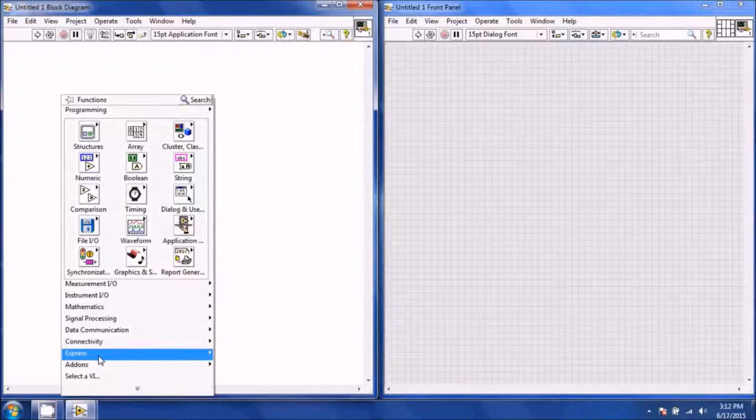And the first thing I'm going to do is insert a DAQ. Go to Express, Input, DAQ Assistant. Then I'm going to go to Acquire Signal, Analog, Temperature, and Thermocouple. I'm going to select my first thermocouple DAQ with the only single channel we have.

And I'm going to change the maximum range to 200 because we are collecting signal at 100 degrees C, which is boiling water. The first thermocouple type is a T-type, and cold-junction compensation is built in. Now you notice that one sample on demand is the acquisition type for this thermocouple DAQ.

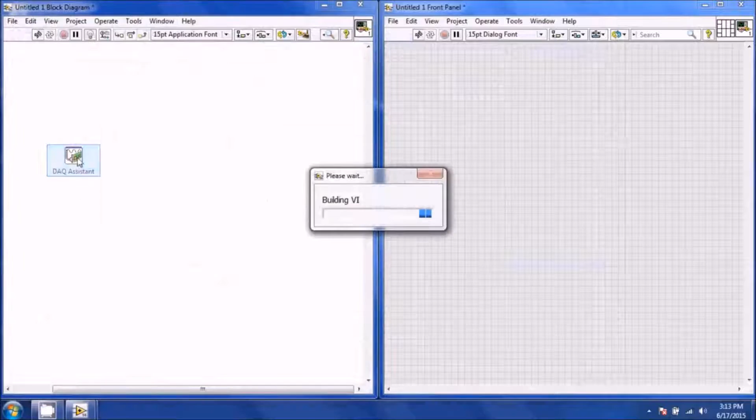Now we can only insert one thermocouple DAQ per DAQ Assistant, so we're going to have to insert another DAQ Assistant. So we're going to go in, Express, Input, DAQ Assistant. I'm going to Acquire Signal, Analog Input, Temperature, Thermocouple, and choose a second device's channel. And again, we're going to change this to 200.

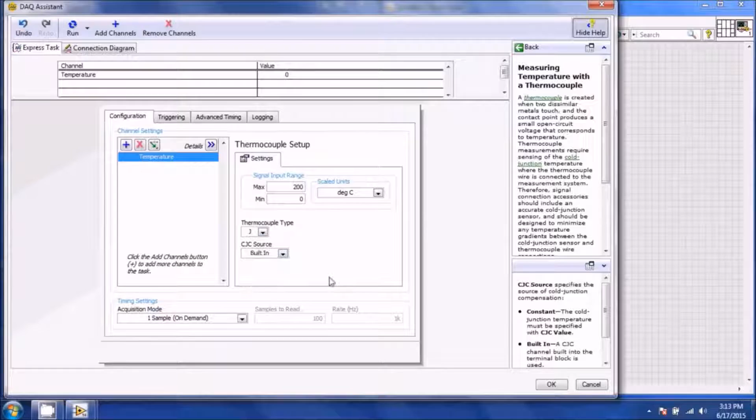Now the second thermocouple type is J, so we're going to keep that as J and do built-in, and you again see that it shows one sample on demand. Now one sample on demand means that it will take one sample, stop, take another sample, stop, take another sample, stop. So in order to create a plot for this, we need to create a waveform chart.

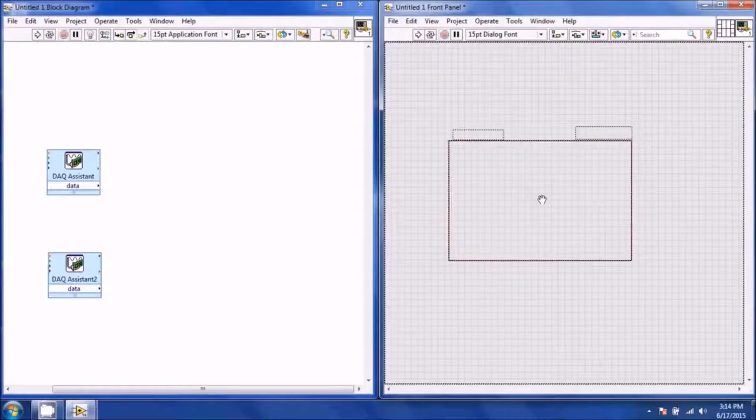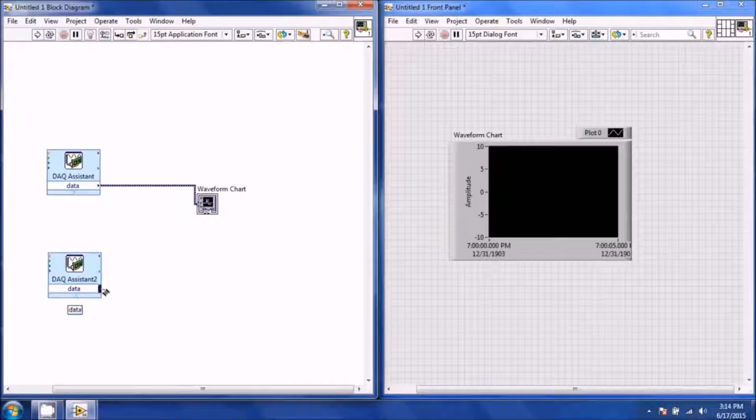And what a waveform chart does is it will take the previous data and add another point on the same chart. So I'm going to connect the output of the first thermocouple to the waveform chart and the second thermocouple to the waveform chart, and you notice it automatically does merge signals to the waveform chart.

Now, in order to run this, you'll see that when I hit run, it only gives you one value. Then you hit run again, and it'll give you a second value. You hit run, and it only collects one sample at a time. So you would see that if I had a waveform graph, it would not show the samples.

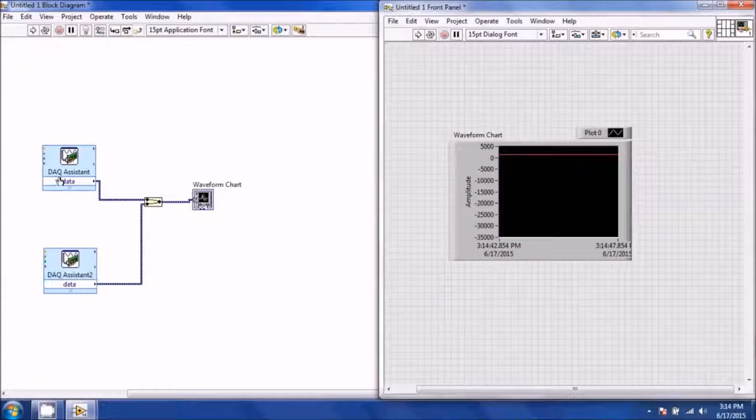Now you can see I have a white and a red line. The white line corresponds to the top thermocouple DAQ, and the red line corresponds to the bottom thermocouple DAQ. So the top one's a T-type, the bottom one's a J-type. So if you go over here by plot and expand it, you'll see a legend.

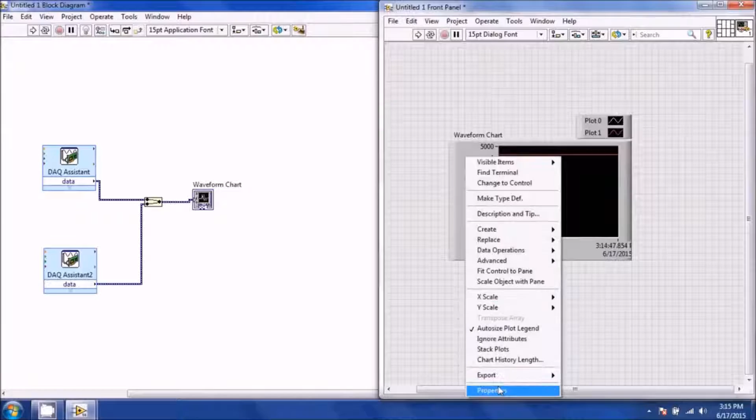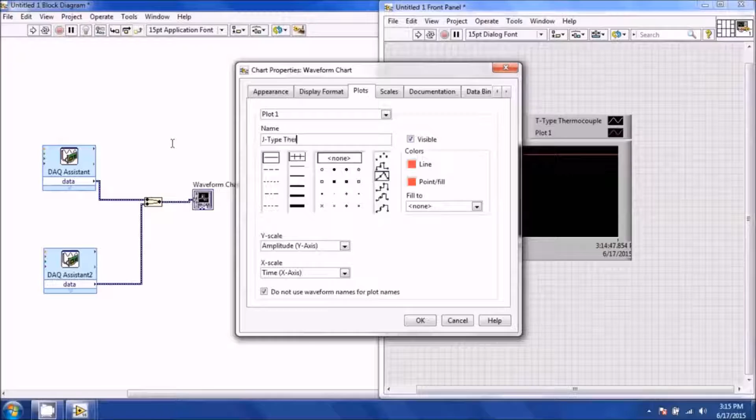We can change the names of this by right-clicking, going into Properties, go to Plots, then do not use waveform names for plot names. And plot 0 is the first one, which is T-type thermocouple. And then go to plot 1, which is our J-type thermocouple. So I'll say J-type thermocouple. So now we have a legend that tells us which thermocouple is which in the waveform chart.

Now, since when we hit run it only collects one sample and then stops, we need to put this in a loop in order to collect multiple data points. So you're going to right-click, go to Express, Execution Control, While Loop, and drag a box around your two DAQs and your waveform chart.

Now, we don't actually want a while loop, so select the border, right-click, and replace with for loop. So now it's a for loop, which means that it will collect samples starting at 0 up to a number of iterations. So we want to define how many samples it collects by creating a control for the iteration count.

So this is our maximum iteration, so I'm going to name it maximum iteration. This is the equivalent of the number of samples we want. And then down here we can create an indicator for the iteration count, so it will tell us what iteration we're at. So if we go to the front panel, I organize this so we can see it. I've got a control for maximum iteration count, and then an iteration count indicator.

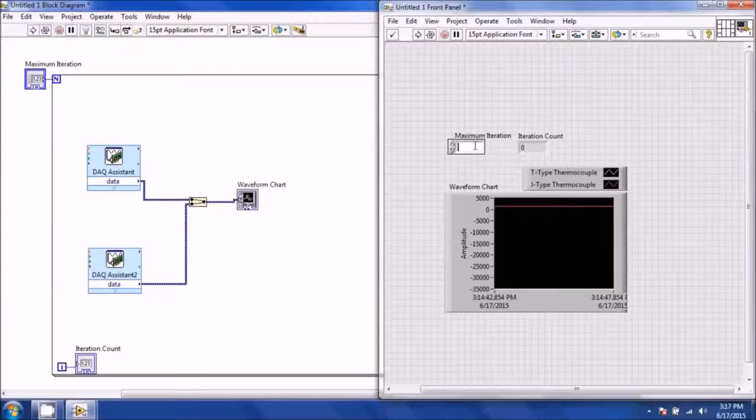Now the way the iteration count works in LabVIEW is that the count starts at 0 and then increases from there. So if I want 100 iterations, the final iteration count is going to be 99. So if I hit run, you can see that it's collecting multiple samples now, and it's at 22, 23, 24, 25, 26, and it keeps on collecting samples.

And it's going to keep on collecting them until we get to 100 samples, or 99 in iteration counts because it starts at 0. And now you can see it stopped.

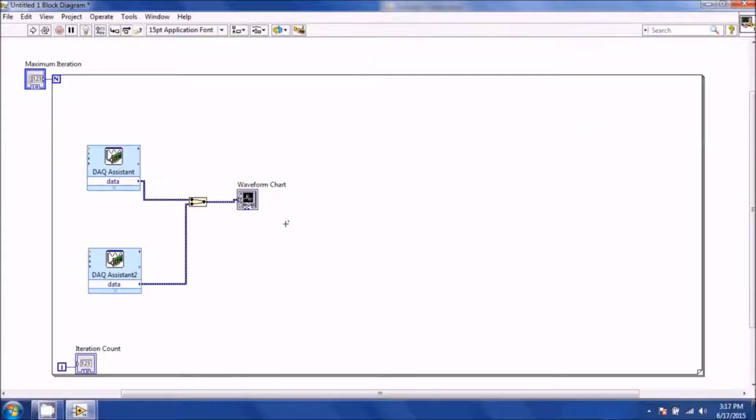Now the next thing we need is to be able to control the interval at which samples are collected. To do that, you right-click, go to Express, Execution Control, and Time Delay. Now I'm going to create a control for time delay, and I'm going to put it on the front panel.

Now the time delay is another method of saying hertz because it's 1/seconds. Now the thermocouple DAQs you have can only sample at a rate of 4 hertz, which means 4 samples per second, which is equivalent to a delay time of 0.25. So if I insert 0.25 for 10 iterations, that means it's going to collect for about 2.5 seconds.

So I go ahead and hit run. Excuse me. And you can see that it collected the data. Now I can increase the delay time, which means that every half second it's now collecting a sample. So it's going to take about 5 seconds to collect data instead of about 2.5.

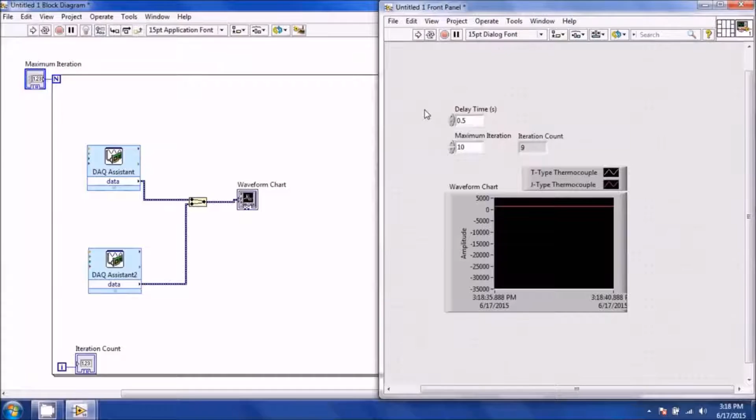Now we don't want to just be able to see the chart. We actually want to see some numbers. And in order to do that, we need to insert a block called collector. And that's under Express, Signal Manipulation, Collector. And you're going to need one for each signal, one for the T, one for the J.

And you're going to set this to the default 1,000 samples as the maximum number of samples that it'll collect. And you're going to connect the signals into it from the 2 DAQs, and then the output will be a collection of all 100 data points, because initially what's coming through this DAQ here is one data point at a time based on the time delay. So every 0.5 seconds one data point is coming through and then being displayed on the chart.

Now what the collector does is it takes those data points and stores them in an array and then returns the full array at the end of each iteration. So it'll take the first value, then the first value and the next value, and it'll keep on displaying it. So you'll see your mean changing as you're collecting.

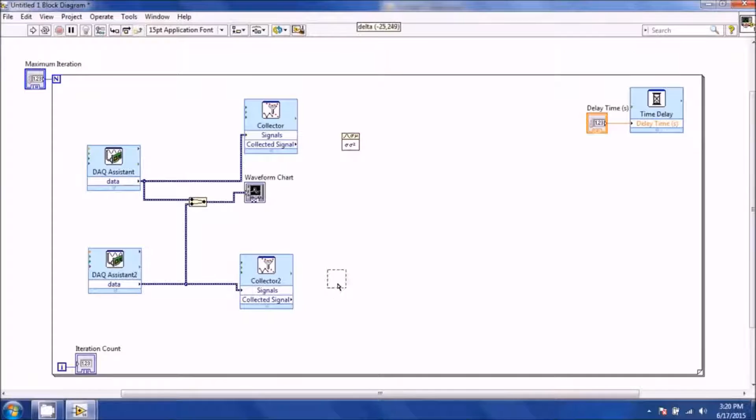Now, we want to display the mean and standard deviation so we can get some statistics about the temperatures we're reading. So I'm going to insert two standard deviation blocks because it's got both the mean and standard deviation in it. And I'm going to connect these to the output of the signal collector. And then I'm going to create an indicator for the mean. And I'm going to call this T-type mean, because then I know that it's a T-type thermocouple mean.

And then I'm going to create an indicator for the standard deviation. And I'm going to call this T-type standard deviation. I'm just going to abbreviate it. And then I'm going to copy these two labels to the J-type, and then I'm going to fix it by changing T to J.

Then I'm going to go to my front panel and reorganize it. So I have my T-type mean on the left here, followed by my T-type standard deviation. And then I have my J-type mean, followed by my J-type standard deviation.

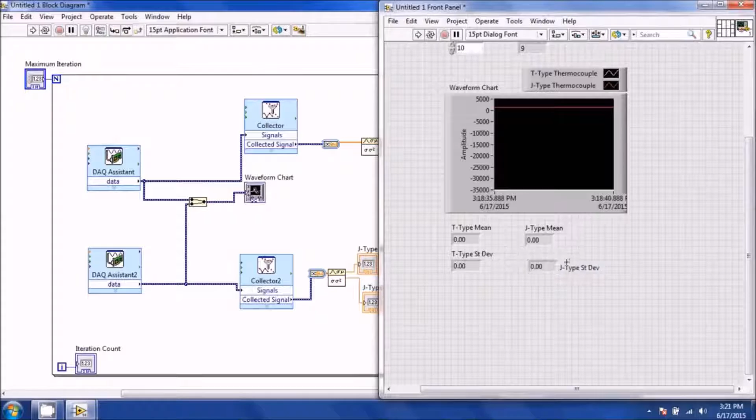Now again, remember that when you insert an indicator on the block diagram, if you're not able to see any results, you need to right click on that indicator, go to Properties, Display Format, and then you change the 2 to a higher number such as 4. So instead of showing 2 decimal places, it shows 4 decimal places. And you can do that with all 4 of them.

So now when I hit run, I'm going to collect 10 samples with the interval of 0.5 seconds, and then it's going to stop. And that final mean and that final standard deviation is the standard deviation and mean for the entire 10 samples.

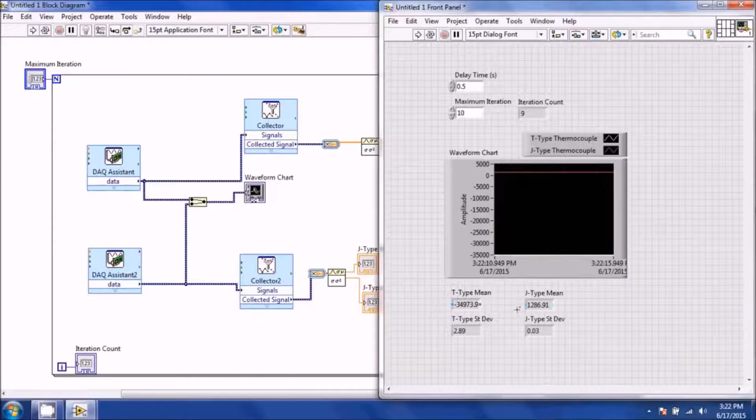So now that we are able to display the temperature in a chart as well as in a mean and a standard deviation, we want to be able to save this data. So to save this data, we've got to insert our Write to Measurement File. So that's on Output, Write to Measurement File. Now, I'm going to select one column only for time, use next available file name, and I'm going to save it on my desktop as test.lvm.

And I'm going to hit OK. So the first thing I'm going to do is I'm going to merge the two signals for the two thermocouples. That way we have the time column, the first time column that corresponds to the X and Y values, basically two channels.

Then I'm going to add in my thermocouple means and standard deviations. So I'm going to start with a T-type. Then I'm going to do the standard deviation and then the mean and standard deviation. And then I'm going to do the J-type, mean and standard deviation.

Now the next thing you want to save is the delay time as a parameter. The main reason you want to do that is that it tells you the time between each sample being taken. When you look at your Excel spreadsheet, it'll have the values labeled as 0, 1, 2, 3, 4, 5, 6, 7, 8, 9, 10. Now, in order to change those into a time variable, you would have to convert the number by multiplying it by the delay time. 0 would be 0, 1 would be 0.5, then 1, then 1.5, 2 if you had a delay time of 0.5.

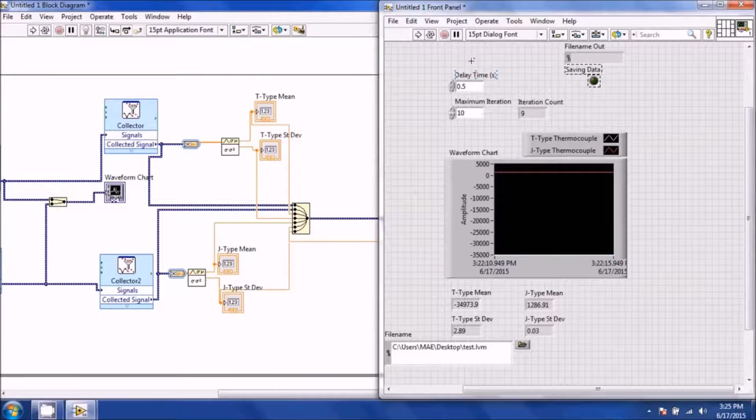Now with the for loop, there comes a little issue when you save the data, and I'm going to show you that right now. So when you hit run, it's going to keep on making a bunch of different files. When I open it, you're going to see that it keeps on doing a header every time because every iteration is collecting that value. And if you have enough iterations, it'll create a bunch of files since you said use next available file name.

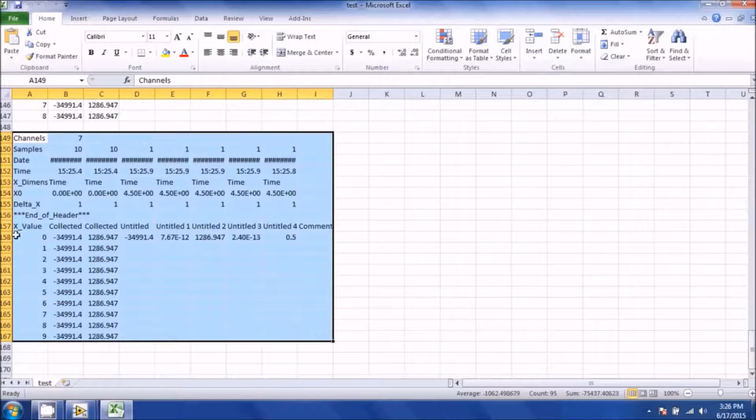Now all we want is just this last one right here. You see here, this one has all 10 data points, but it starts saving everything from 0, then 1, 2, 3, 4, 5, 6, 7, 8, 9, 10. So what we're going to do is create a little Boolean, or should I say conditional statement, to tell it when to save.

We're going to do that by first inserting a numeric subtraction, and we're going to create a constant of 1. We're going to connect the first part of it to our max iteration count, so our n number of samples. The reason why we're doing n minus 1 is that the iteration count starts at 0. So the first iteration is 0, 1, 2, 3, 4, 5, 6, 7, 8, 9. So if I type in 10, I want 10 samples. Then 10 minus 1 is 9.

So that means that when the iteration count is equal to 9, n minus 1 is 9, and that's when I have all my data collected. Since my maximum iteration count is 10, but the iteration count starts at 0, 10 minus 1 is 9, and the last iteration count for 10 iterations is 9. I'm going to create an equals because I want it to save a file at the very last iteration when all information has been received. So I go into Express, Arithmetic and Comparison, and Equals.

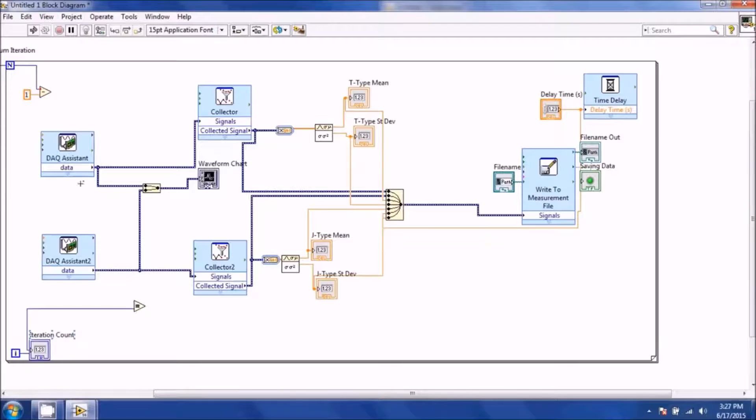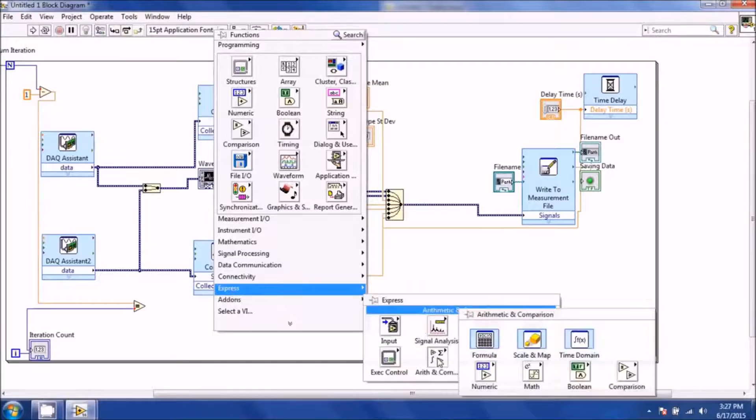What I'm going to say is if the iteration count is equal to the maximum iterations minus 1, then I want to do something. And the thing that I want to do is create a selector, which means that it will be one value if it's true and another value if it's false. So the output of this is a Boolean, true or false. If it's true, it'll send this top node through to the right side. If it's false, it'll send the bottom node through.

And what I'm going to attach to the top and bottom nodes is a true and a false constant. So I'm going to copy that constant, and then make sure I click on it so it says true. The true constant I want to go through if it's equal, and false if it's not equal. And I'm going to hook the output of this selector to our enable. What this will do is that when this iteration count is equal to our maximum iteration minus 1, so if you want 100 samples, iteration count starts at 0.

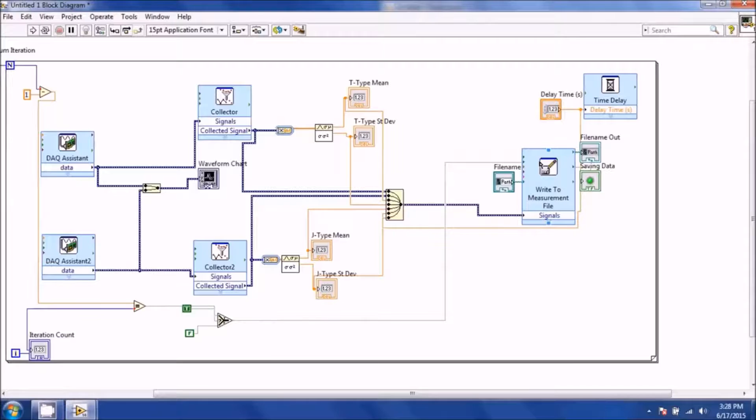The last iteration count, or 100th iteration, is 99. So if the iteration count is equal to 99, then I want this to be true, which means that it enables the Write to Measurement File to save. Else I want it false. That way when I hit run, which I'll do right now, I won't get what we saw before in the Excel file. I'll just get the one set of complete data, not 0, then 1, 2, 3, 4, 5, 6, 7 extra points in it.

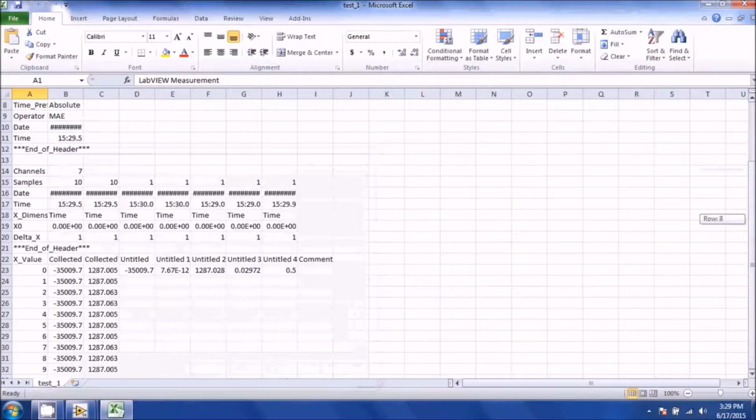So now when I open test 1, I'll see that it has all 10 data points already in it as a single one. So you can see here it has all 10 data points shown here.

Now, I can rename my signals using the dynamic attributes method, like we have done for the past 2 labs. And I'm going to go ahead and insert that in after the merge, make it a little bit easier for me to manage everything. So I'm going to move things around on here. And then I need 1, 2, 3, 4, 5, 6, 7 different dynamic attributes.

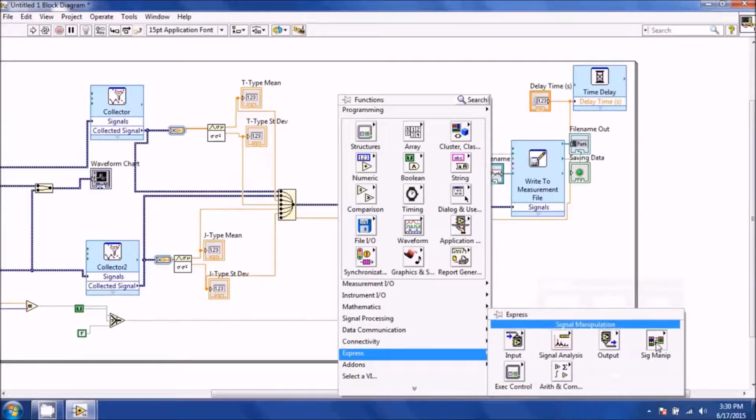So I'm going to go to Express, Signal Manipulation, Set Attributes. I'm going to insert it. I'm going to do signal name and X dimension. And don't forget you have to do your signal index of which signal you want to modify. I'm going to make a copy of it, as I need 7 of them. Now I have 6, 7.

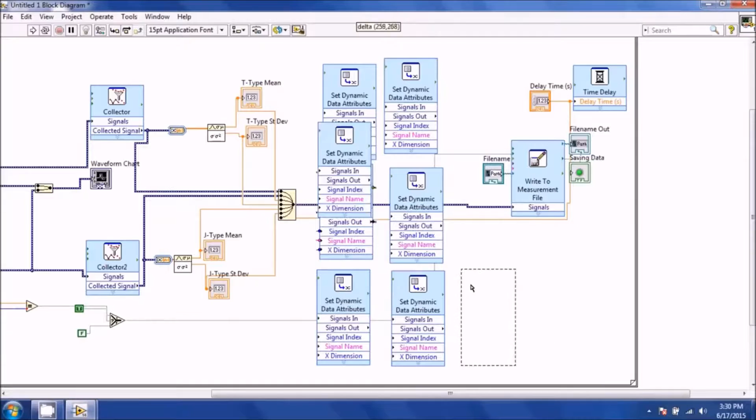And I'm going to delete this wire going from my write to measurements. And I'm going to connect the final output to write to measurements. And then I'm going to connect this signal input to output, input to output, and so on, input to the merge. I'm going to rearrange this a little bit so it's a little bit neater and give myself some space to put in the controls. And then move everything to the right a little bit so I have a little extra room.

And now I'm going to insert my constant, insert constant, insert constant. And this one, for the first one, it's in temperature. And that is not a choice. I'm just going to say no units. So I'm going to not use my X dimension on all these. I'm just going to ignore it. So this first signal is T-type

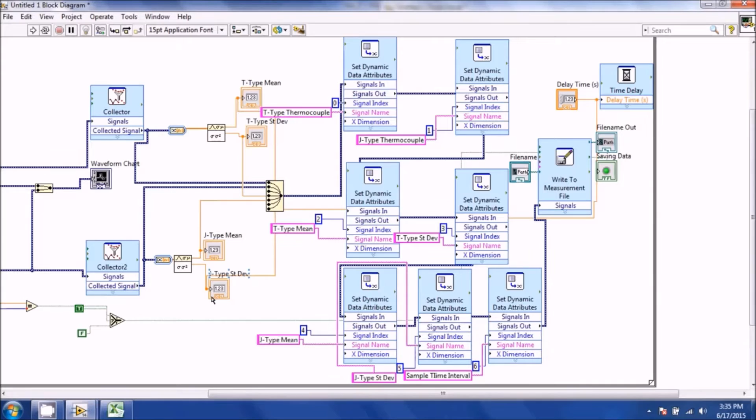And you go to signal index and signal name. And now, I forgot to connect 2 of them. So I connect the 2, and then I go back and rerun it. It'll be test_2_3 on the final iteration. And then I'll open that. And then you can see that all of them have been labeled properly.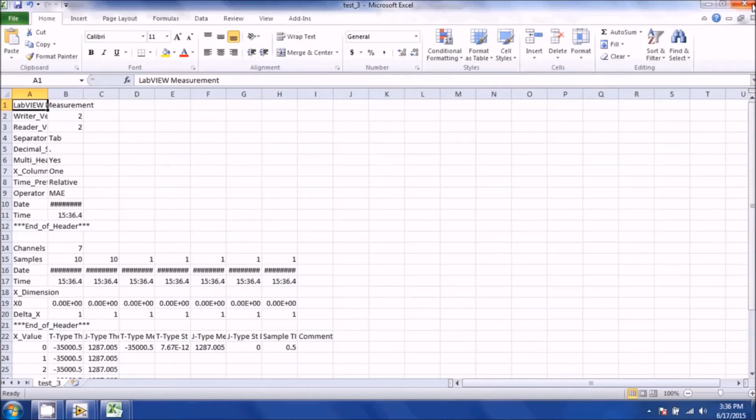So now you know how to label them and collect samples using the thermocouple DAQ with 2 of them, using a for loop with the iteration count to make your number of samples, and create a Boolean to see if the sample iteration count is equal to maximum samples, and if it is, save the write to measurements file, this time with the column names. That's how you set up your VI so you can collect samples for 2 different thermocouples at the same time.